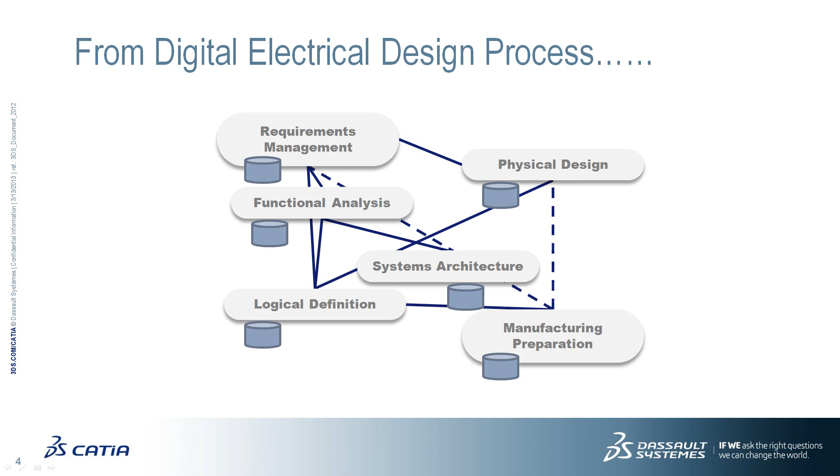To address the challenge of traceability, we propose a systems engineering approach, where all process steps are centered around the 3D Experience platform. We call this an RFLP approach, from requirement management through functional decomposition, followed by the logical systems architecture and definition, to the physical design and manufacturing preparation. All these process steps are linked through the 3D Experience platform, which brings a fully traceable process.

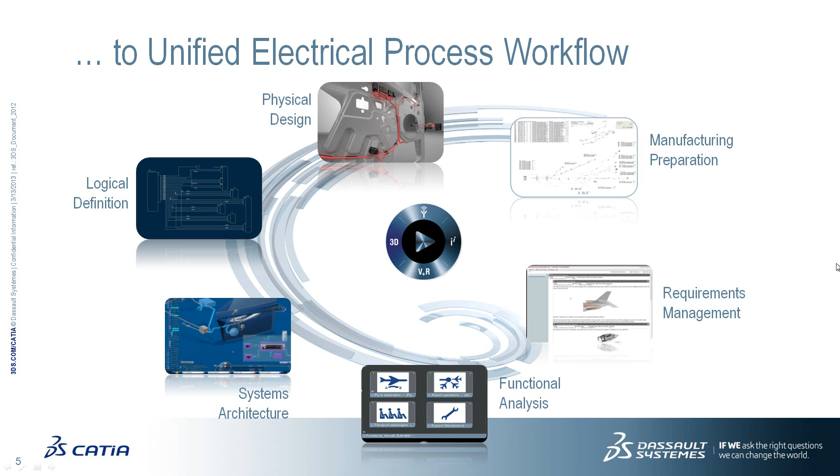The 3D Experience platform brings all capabilities to allow a streamlined global collaboration. First, it serves as a social enabler, allowing all stakeholders from mechanical to electrical and from architects to 3D detail designers to communicate in real time, sharing screens, design ideas, and allowing brainstorming to design innovative products.

Secondly, it allows also for full traceability, even for where-used scenarios of components, and understanding the impact of design changes. Thirdly, concurrent engineering is supported since all stakeholders work on the same database, and all components of the electrical wire harness assembly are stored and linked in the database.

Having all these components in the database, we can also perform configuration management and create variants addressing specific needs out of a 150% harness assembly. Last but not least, this allows as well for BOM management to create bills of materials and provides all kinds of reporting capabilities for ordering, manufacturing and certification of your products and components.

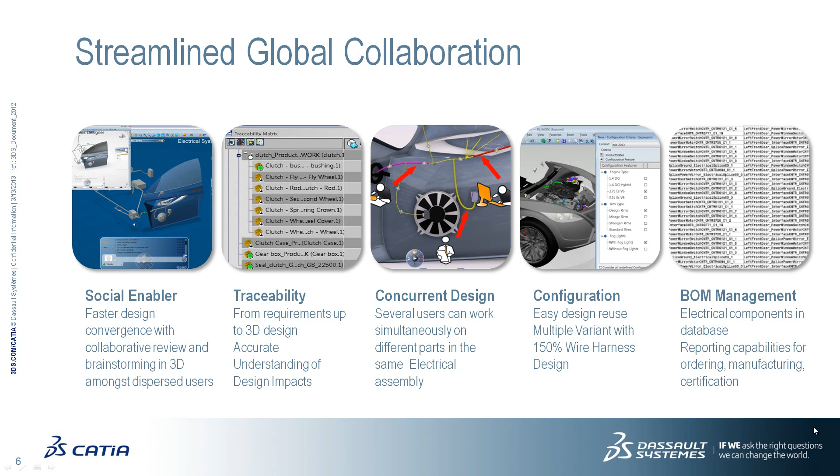Besides providing a systems engineering approach and a 3D Experience platform allowing full collaboration, we are also offering all needed user experiences to address the different process steps, from requirement management system, electrical system schematics, to all capabilities to design any type of harness in full 3D and prepare the manufacturing. In the next slides we will show you some examples of this, supported by videos.

In this first example we show you, in the context of an aircraft, how a designer is using CATIA to place components from the database, creating the harness and performing some modifications in a very easy and user-friendly way.

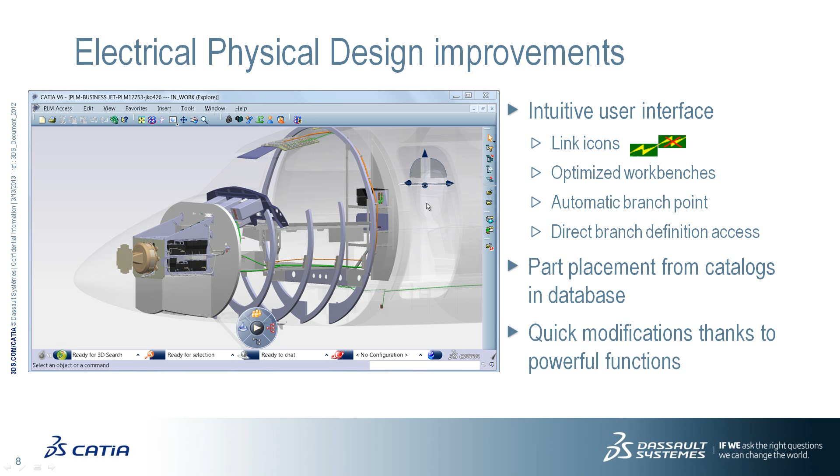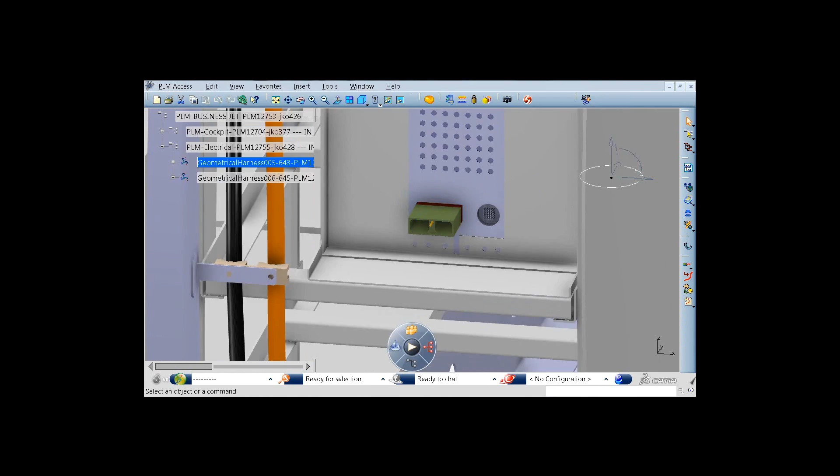In the first video we will see how CATIA is supporting the engineer to create a harness assembly in an aircraft context. First, he loads the needed assembly parts in context in his CATIA session, and then from the database he is selecting the components to build his connector. CATIA will automatically assemble these with the right connection points.

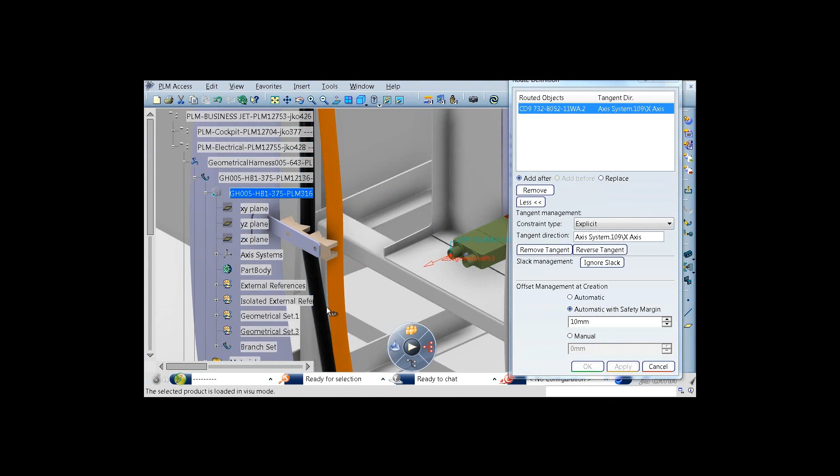When the connector is built, it's time to create the bundle segments. You see here how easy in V6 it is to build a harness assembly, continuously guided by the system to show if components are linked or not, using little wizard signs. Also, creating automatic branch points is very easy by just clicking on an existing harness bundle.

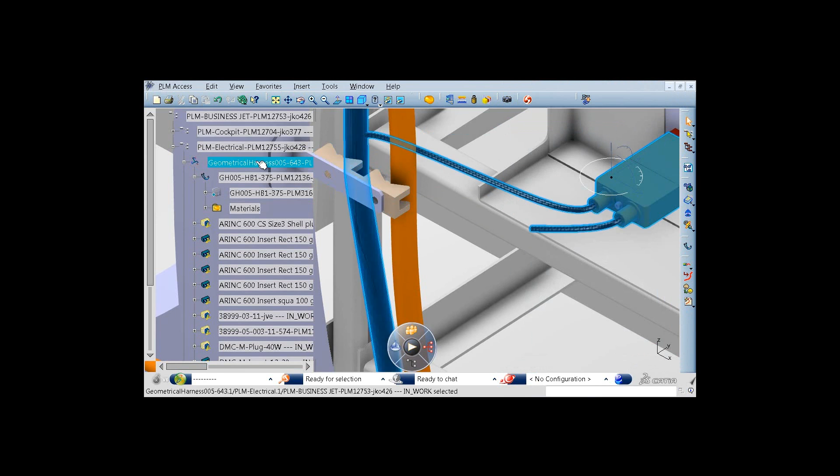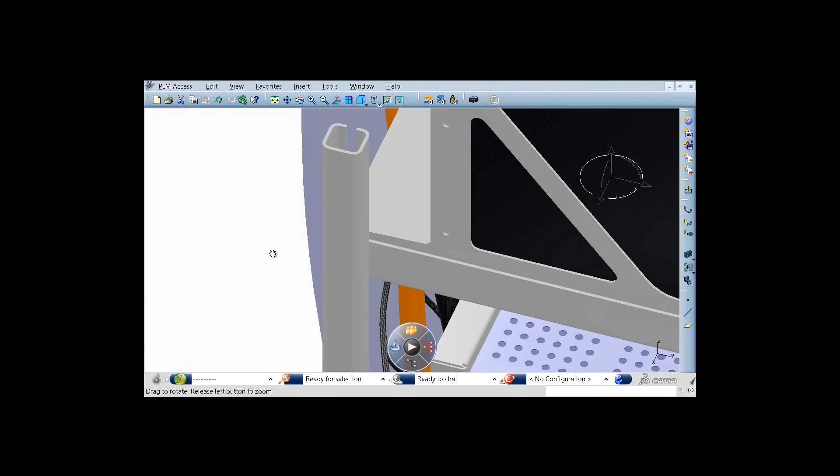Next step is to do the modification to guide the just-created harness through the support here on the left side, positioning it inside the support, supported by CATIA for easy guidance and placement of the bundle inside this support. Adding some slack and then performing some modifications to avoid collisions between other harnesses—all in a very intuitive user interface.

The second example shows you how CATIA is helping the engineer to build very realistic flat cables in context of the 3D product, with a very intuitive user interface and powerful modification capabilities to perform the creation of flat cables.

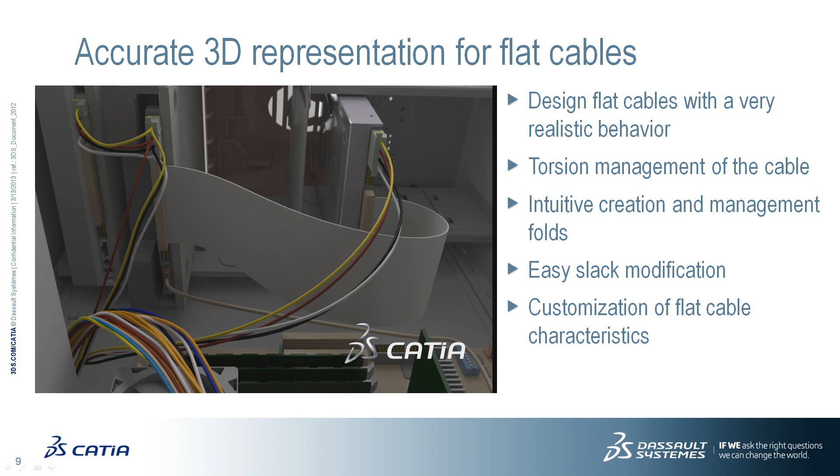CATIA version 6 delivers a new and accurate 3D representation for flat cables, which considers the torsion of the cable's profile along its center curve, according to specific material properties.

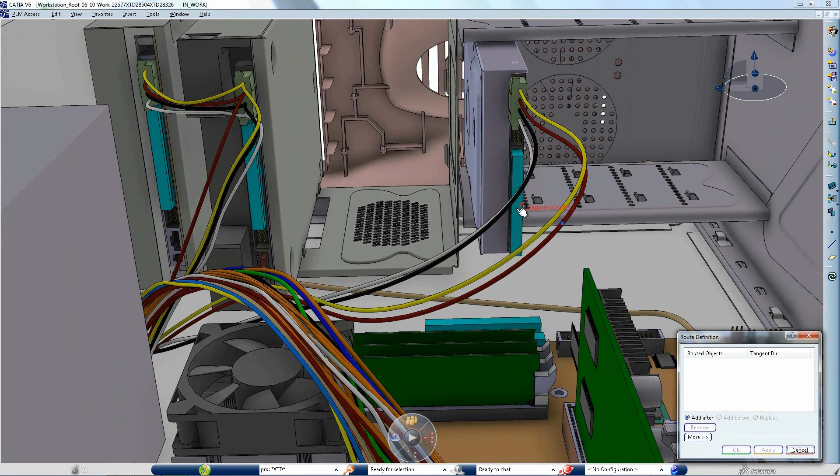Creating a flat cable follows the same principles as for a standard cable. You simply need to select the objects to route through in order to complete the definition.

Once the flat cable is routed, you can change its torsion by accurately rotating the flat cable profile along its curve. You may also change the orientation, as we see here, simply by flipping one connector.

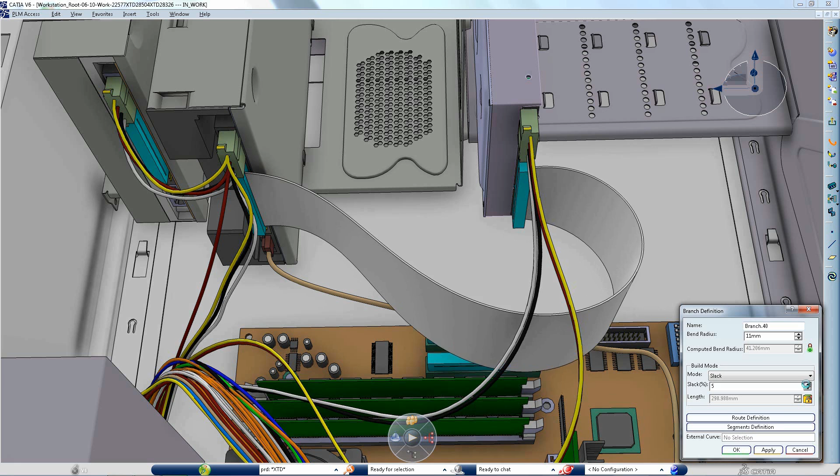You can accurately adjust the length of the flat cable by increasing, as we see here, the slack in the branch definition dialog box.

While manipulating route objects, in this case the right connector extremity on the hard drive, the shape of the flat cable automatically adjusts to the new situation, taking into account the real flexible behavior of the cable.

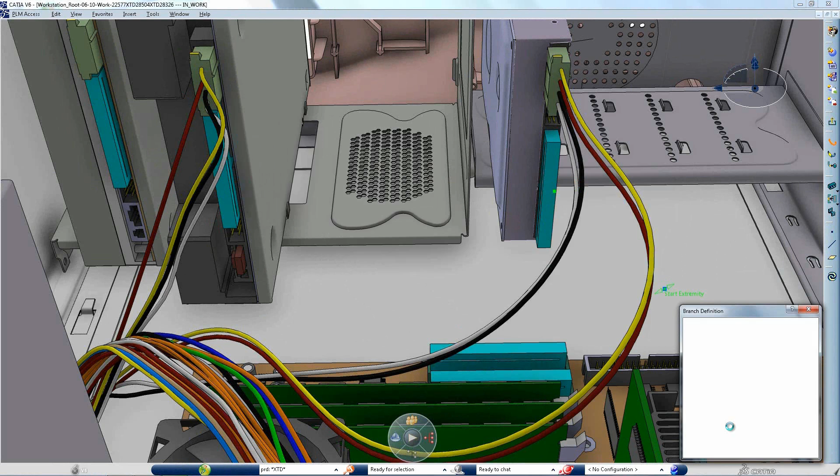The product also features the creation and management of 2D folds on a routed flat cable. You just need to create a branch point to define where you want the fold to be located on the branch curve. Once the branch is folded, this functionality enables the modification and customization of dedicated fold parameters in order to modify the fold as required.

Moving the 2D fold along the cable curve is easy. To adjust the position afterwards, just drag and drop that previously created branch point along the cable.

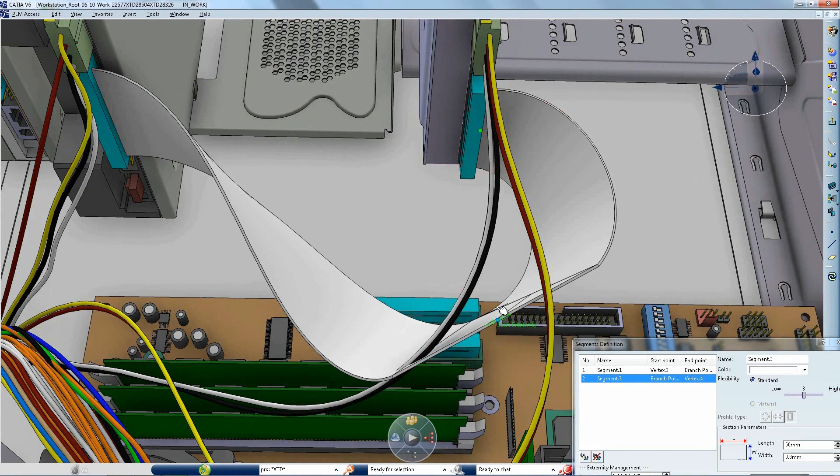CATIA version 6 makes it possible to design flat cables with realistic behavior, increasing the overall model's quality and realism.

To improve the quality of the assembled harness, it is essential that during the design phase the user can already investigate and discover problem areas and check for link issues between connectors and harness assemblies. CATIA provides the user powerful capabilities not only to discover these errors but also to correct them during the design phase before going to production.

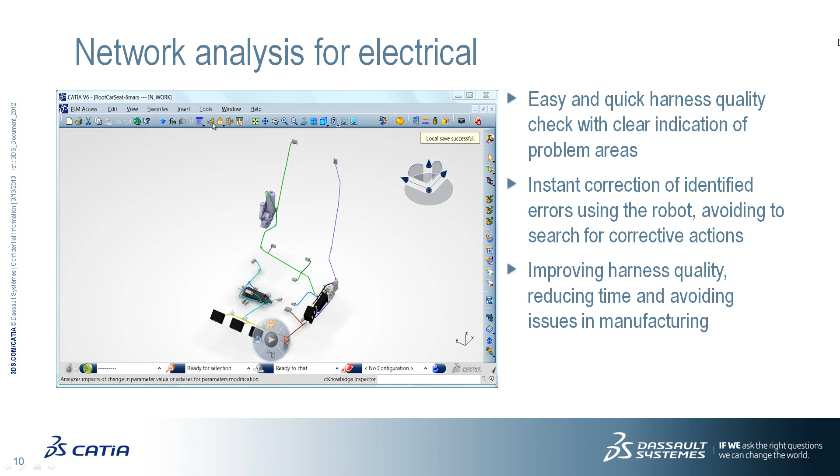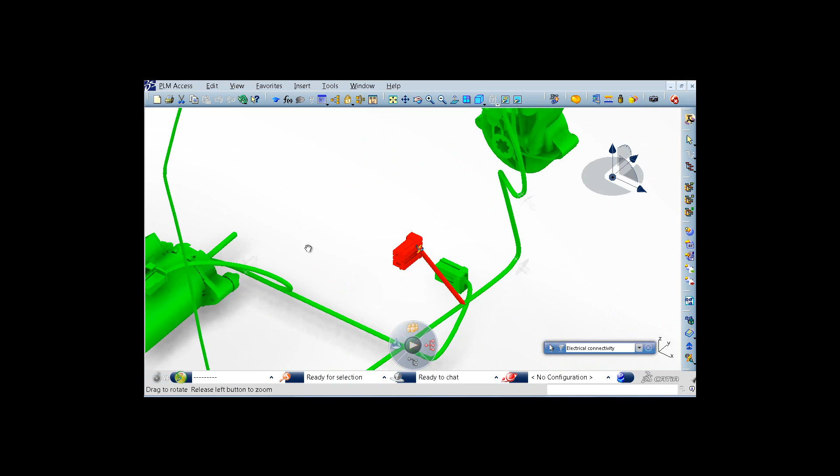With the Network Analysis tool, a designer can very simply analyze his complete harness assembly for errors like disconnected connectors, or issues where equipment and connectors are not connected. In this case, after running the analysis, you will discover very easily the problem areas.

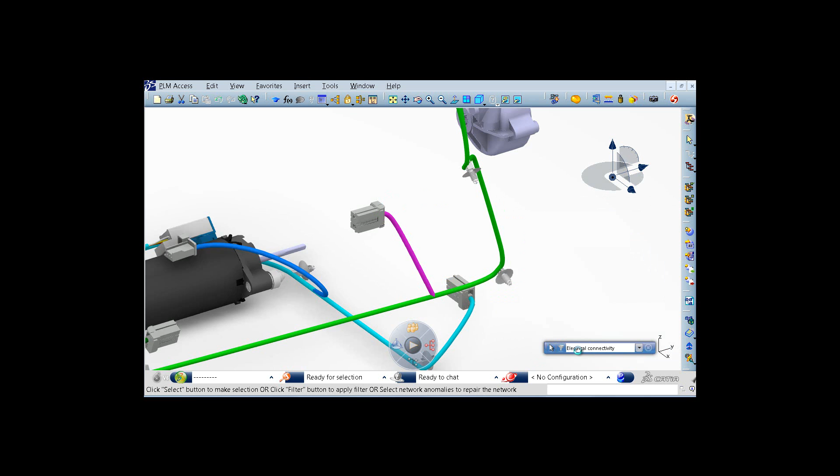In this case, a connector and a bundle are not properly connected. Without leaving the function itself, the user can now correct this and make the necessary arrangement to place the bundle on the right side of the connector. Instantly, CATIA will show that everything is green and properly connected.

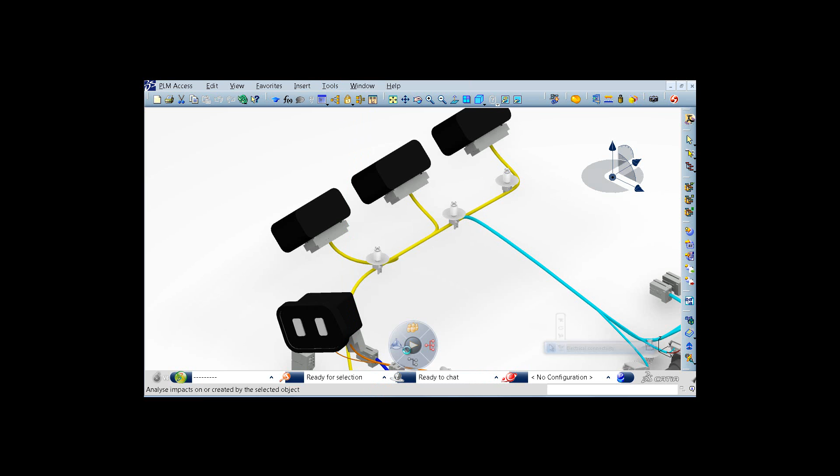In the second case, a connector is not properly connected or not linked to an equipment. By clicking on the link management capabilities, the user can perform the necessary corrections. After doing that and running it again, it will show all green, meaning the harness is fully connected, all connectors and bundles are connected, and the connectors and equipment are properly connected.

The last example will show how, out of the complete 3D wire harness assembly, we can create the necessary documentation and form board. The video will show the complete process from 3D to the flattened view, including creation of the necessary drawings. It will also highlight how, in complex connectors, the shape of the wire harness assembly is maintained.

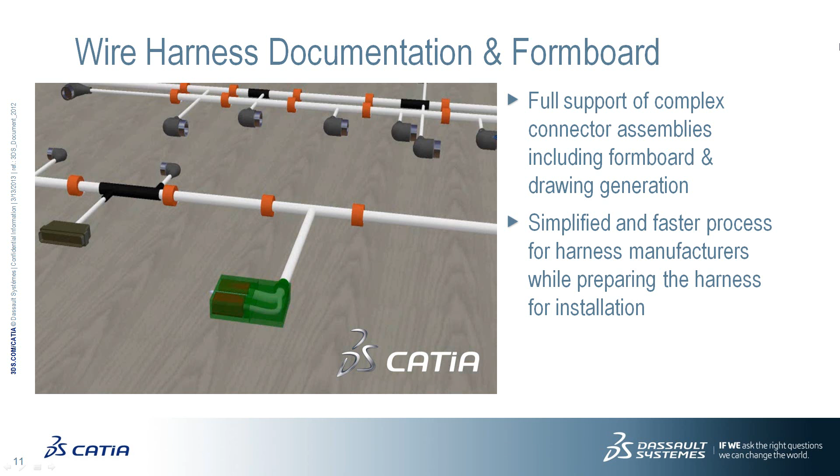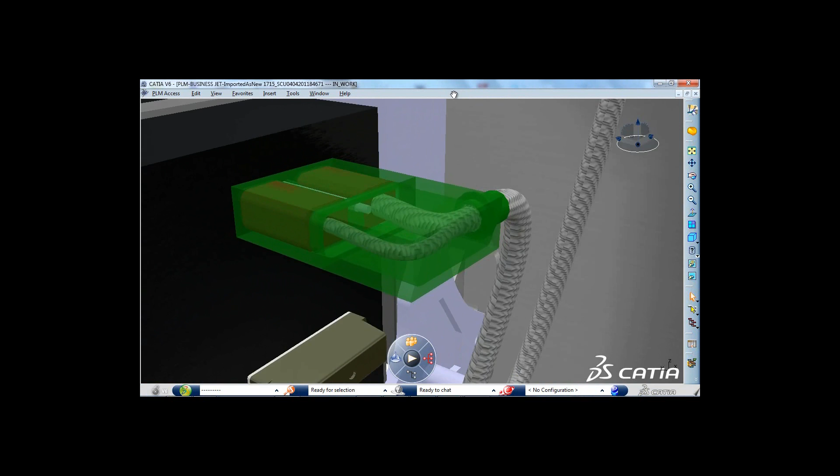With CATIA V6, you can achieve the flattening of electrical wire harnesses to define a 3D manufacturing harness form board. With this new release, the entire wire harness flattening and form board process, including drawing generation, now handles complex connector assemblies. Let's take the example of the wire harness of a business jet's nose to visualize the workflow.

We can see that the extract process now takes into account all types of device assemblies, respecting the entire structure and electrical connectivity.

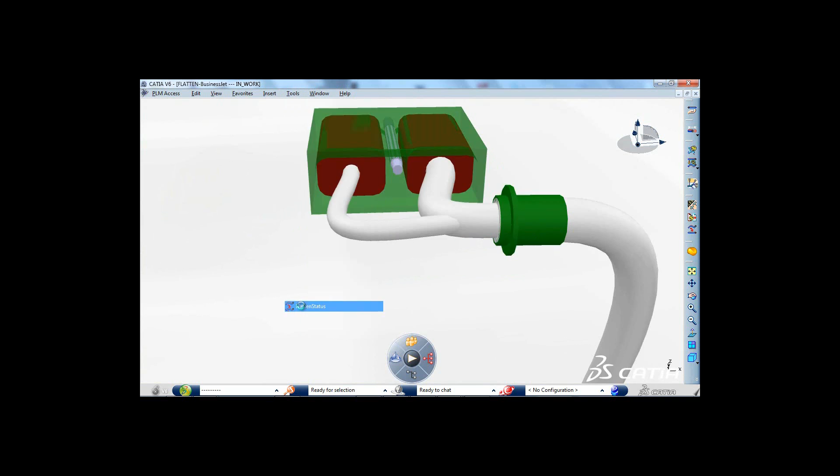A dedicated command is provided to define the branches that do not need to be flattened, like inside a complex connector, to respect the manufacturing process. When flattening the whole assembly on the form board, the branches indicated previously will keep the same shape as in 3D.

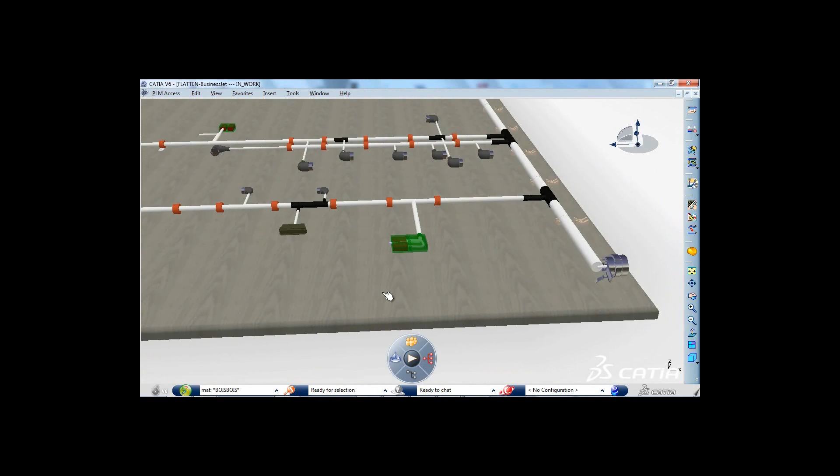After the automatic flattening step, the CATIA wire harness documentation and form board product lets you manipulate the flattened harness, including complex connectors, very intuitively to finalize its layout.

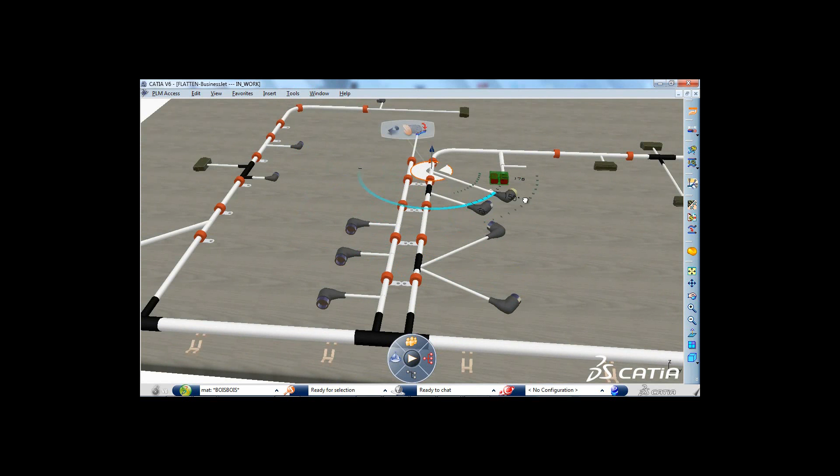These new capabilities will facilitate and accelerate the process for harness manufacturers, because they will now be able to visualize the representation of complex device assemblies in the drawing while preparing the harness for the installation step. Drawing creation is automatic and takes only a few clicks, as well as the generation of complex connector section views, which is very useful for routing wires in the harness on the form board.

Quality documentation creation and successful design collaboration between harness designers and manufacturers will now work better than ever with CATIA V6.

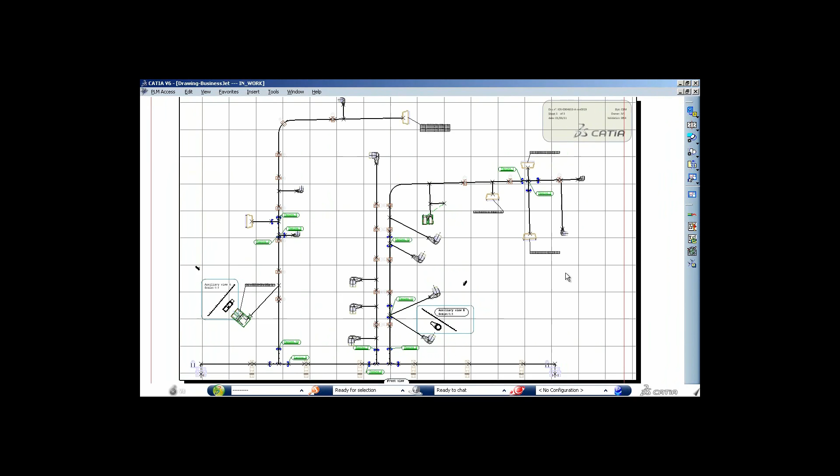As a summary, CATIA Electrical, based on the 3D Experience platform, allows you to implement a unified electrical process based on a system engineering approach, from requirement management, functional analysis, systems architecture and logical definition, up to physical design and manufacturing preparation. The 3D Experience platform allows you to have a streamlined global collaboration between all the stakeholders in your process during the complete process. The first-class user experience allows your designers, engineers and manufacturing teams to build even the most complex harnesses.